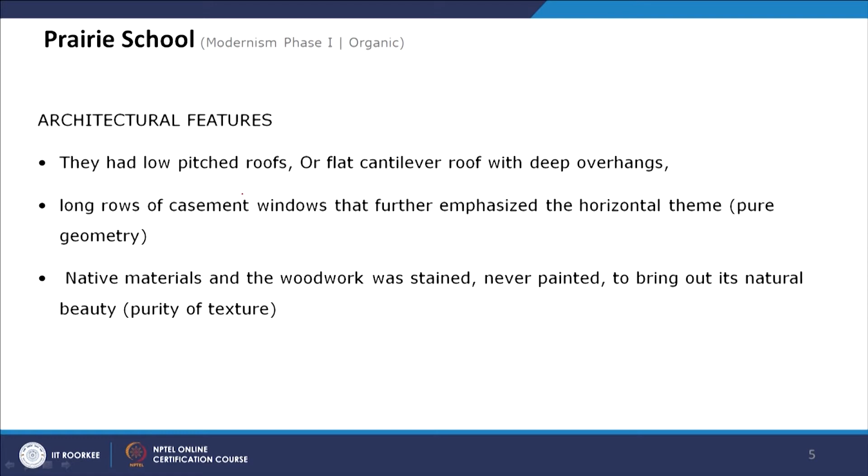So in Prairie, as we have already discussed earlier, it takes from the Prairie grassland, and then low pitch, flat cantilever, pure geometry, native material, pure texture are there. And we'll also see it's never painted, and the material's own texture and own color will be the final color and texture of the building. So that is also there in the Robie House and other buildings. And if it is plastered, it will be white plaster, and if it is concrete, the concrete's color will be there.

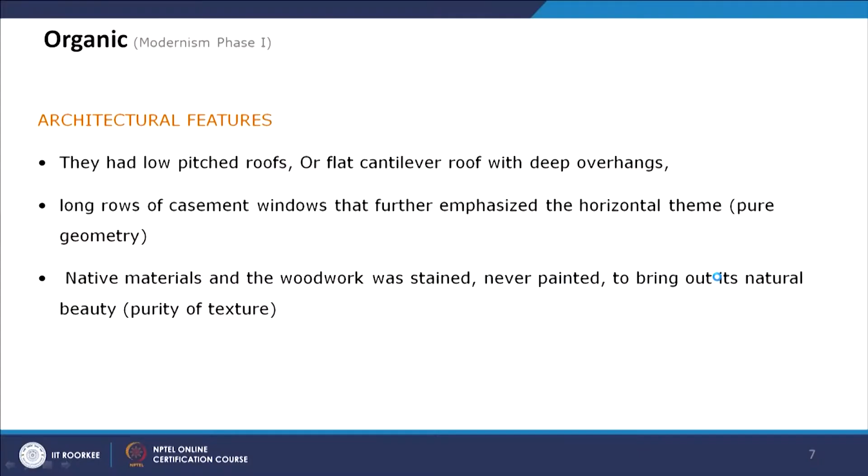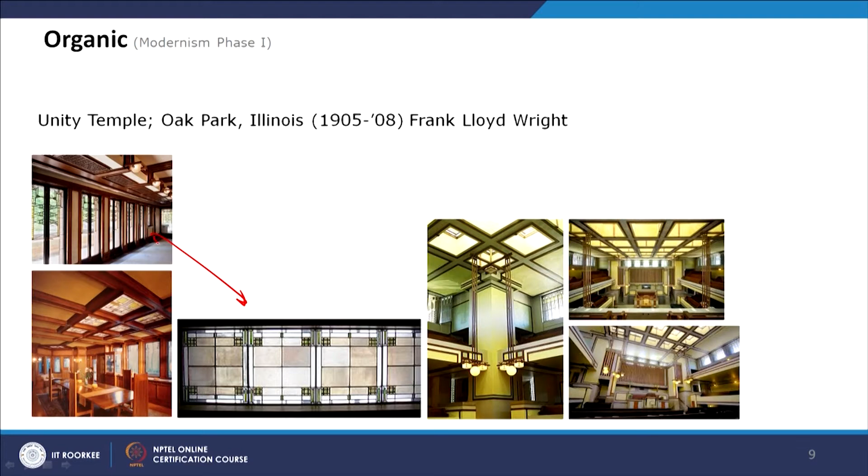So we have seen a few examples of Prairie architecture, and we started discussing the organic architecture style, and we discussed the visual similarity of the organic architecture style with the Prairie architecture style and Frank Lloyd Wright's painting. So you see the similarity in the interior design in Prairie and organic architecture style.

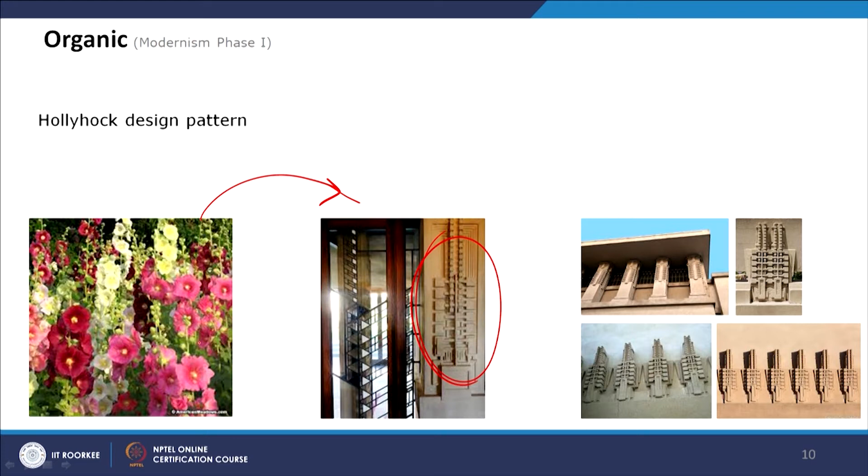And we have also discussed how a biomorphic pattern is an inspiration for making a geometric abstract design, which comes from the Prairie on the hollyhock flower, and that is how the organic architecture style imbibes nature and translates that into its design. So the same kind of flowers and floral patterns are there, but it's extremely geometric and modern in nature. And we have seen these biomorphic lines in the previous architecture style, which is Art Nouveau. So the whiplash pattern was there.

Now as we were discussing, from the more biomorphic style we are going towards abstract simplicity. The same inspiration of a floral pattern in Art Nouveau would have been done in a very fluid way, with biomorphic lines and no repetition, because in Art Nouveau, as we discussed, one pattern will be different from the others. We have seen that in Victor Horta's Hotel Tassel and Antonio Gaudi's work in Barcelona, Casa Mila, where all the lines are very fluid and no lines repeat. In Casa Mila's metal work, each and every balcony's metal work is different from the others.

But in the later styles like Art Deco and other architectural styles, we'll see repetition, so that it can be mass manufactured, and the motif can be generated in industry, and the same repetition can happen. So we see repetition, and we see more and more geometric pattern. So here we see total geometry, which represents nature, but in Art Nouveau we see a lot of curvilinear lines which represent nature.

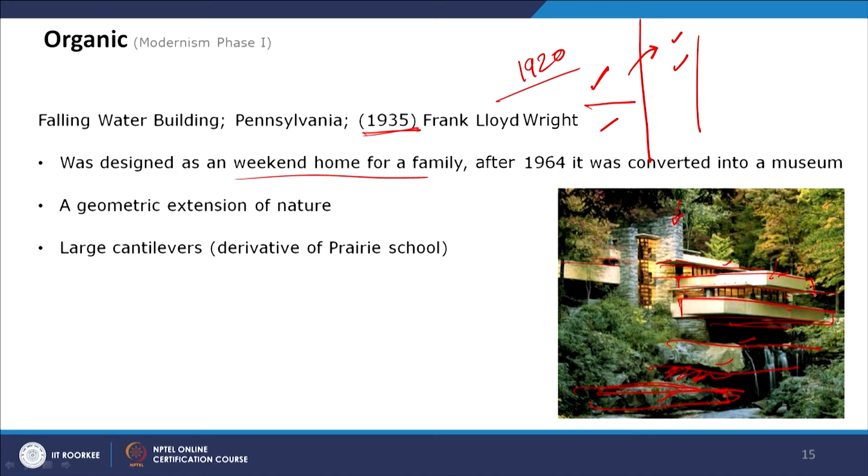He creates in the architecture a man-made element from nature. It's again a solid and then a void. Why is this a void? Because here is a series of windows, which is again an architectural style of Frank Lloyd Wright. We have seen the series of casement windows in Robie House, in the Oak Park building, and also in Unity Temple and the Hollyhock building. The series of windows gives a horizontal line, and here acts as a void. Because glass is a very fragile material and you can see through it, it acts as a void, then very solid, robust concrete, then again a void, and again concrete, stacked on top of each other, and the robustness diminishes.

So if you look at this, there is strong stone, a bigger volume, then a smaller one, and this becomes a more fragile and smaller volume, which is then repeated by this flat, very thin cantilever line. So gradually this diminishes from the bottom upwards.

And if you look at the texture, there is a texture break here, because this is a stone texture and this is white plaster, but here we see the stonework again. The stone masonry, which complements the color of this stone, is repeated as a robust vertical line, which again visually connects nature into the building. That is why this building is so important; it is a proper manifestation of pure artwork, blending nature into the building. And if you look, this building is situated on top of a cascade.

The water flows in the nature, and when the building is built, it's built on top of this cascade, but it does not hamper the flow of the water. The water flows within the building, and we'll see how the natural stone and water is also visible and amalgamated within the building's different rooms. So we'll see some other photographs of this building.

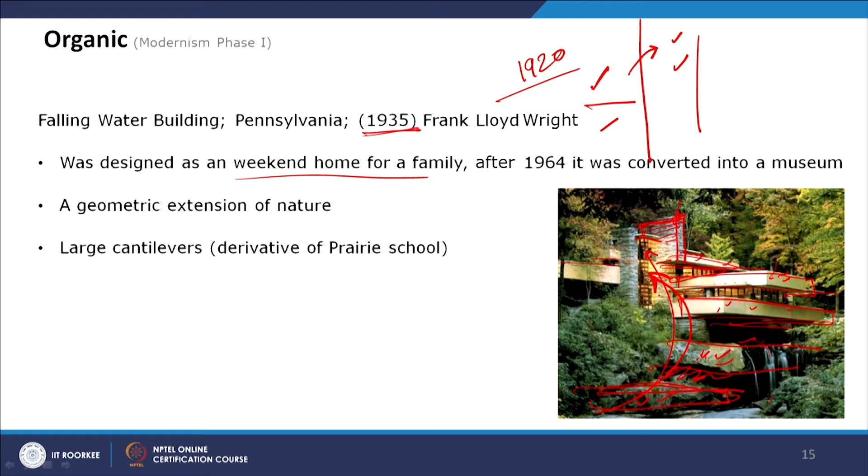it contextually responds with the nature, and nature does not create a pure geometry. But as the modernist movement talks about geometry and straight lines, this natural form, natural contour is divided into many different straight lines and many different cuboids, and arranging all these cuboids together gives the outline of the form. So this does not have a very solid and robust form from outside. This is broken from outside, and that responds to the curve of nature.

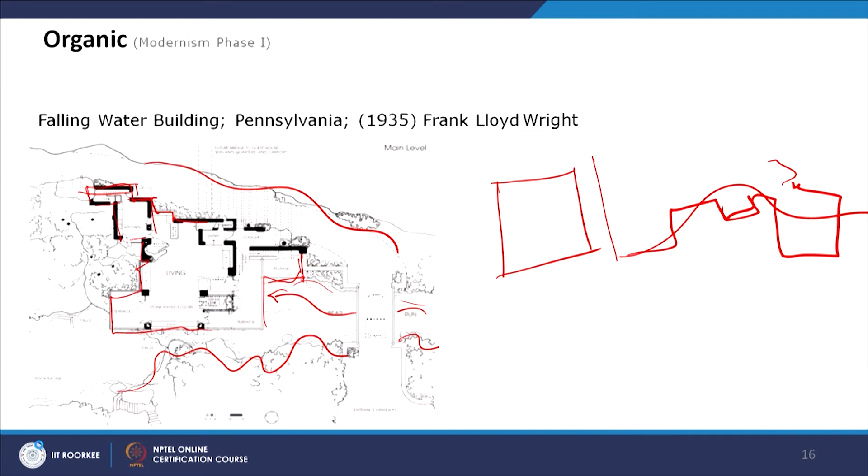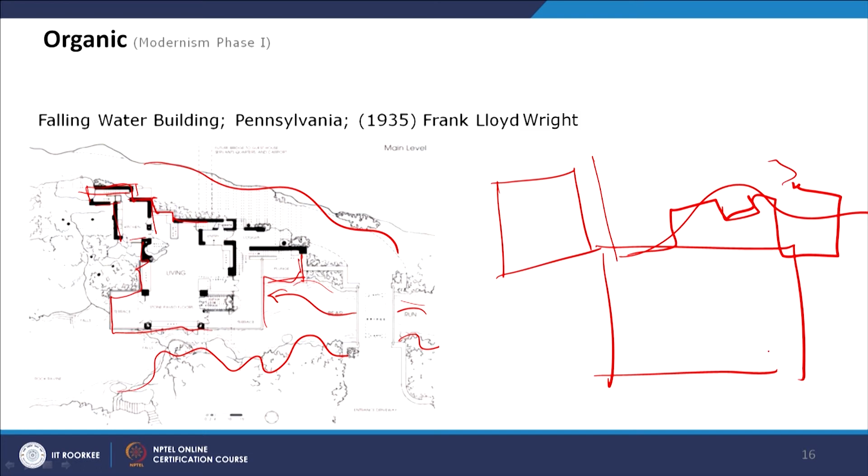And also you will see this stream is passing through this building, and if we look at the floor of this building, this also corresponds within the building as well. So if we look at the building inside, the building's floor has a natural stone. The flooring of the building is the stone which is available in the nature, and he did not polish the stone, and the undulations of the natural stones are also there inside the building.

And similar strong cantilever lines will be visible inside the building as well. So you see this solid and void which is replicated here, and the outside periphery of the building does not follow a particular line. So if you look at the structural member, which is the column inside this glass curtain wall, the glass windows, they don't match with each other, so that gives a more fluid form.

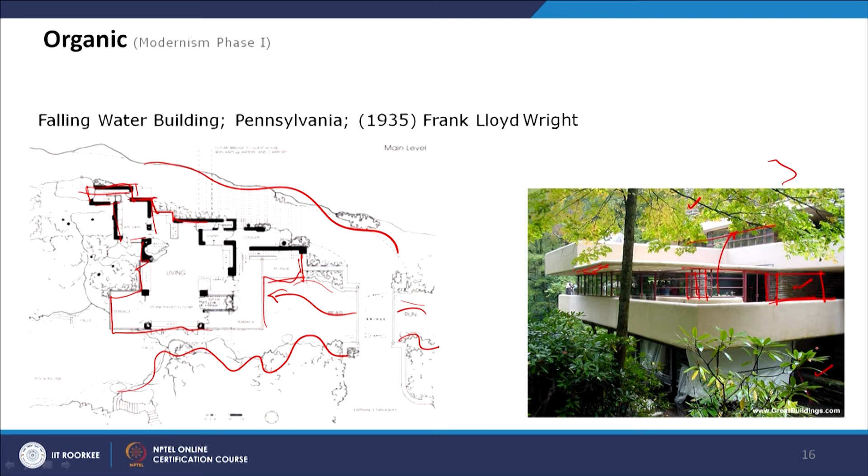And then if we look at this cantilever, it's a very thin cantilever which also has a similarity with the Prairie architectural style, and his style of long casement windows are also there. And in between you will see this kind of stone masonry work, which replicates the stone boulders on top of which the Fallingwater building is constructed. So that is followed within the building as well.

Now from each and every side there are small niches and small corners. You will see this kind of nature which blends within the building. So natural materials are also there in the built form, and corner elements of the windows are avoided, so that it gives a maximum view from the corner of the building, because this corner window gives a wider viewpoint.

Now there are other photographs you can search on the net where, within the building as well, natural stones are there inside the interior of the building near the fireplace. And the fireplace is what you see in the vertical element, which has a similar kind of stonework, the vertical element we were showing in the first photograph. This one comes from the fireplace.

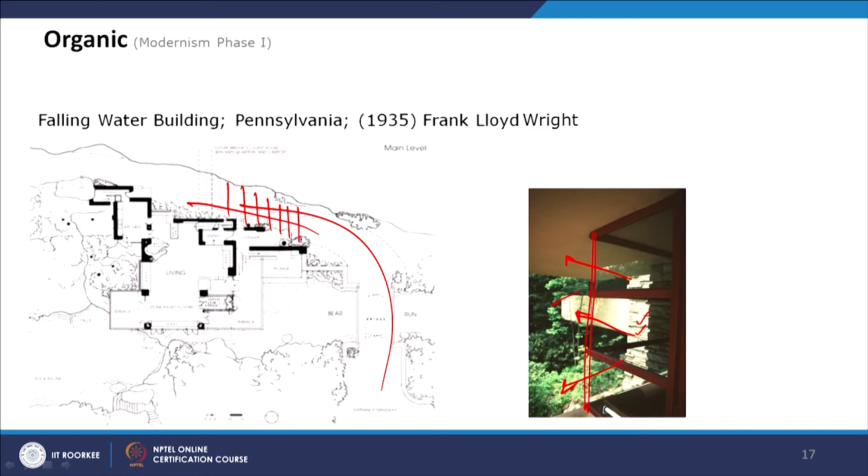Now if we look at some other works of Frank Lloyd Wright, which is not architecture, also in industrial design and in painting and window frame design, we see the similar kind of pattern in Frank Lloyd Wright's design.

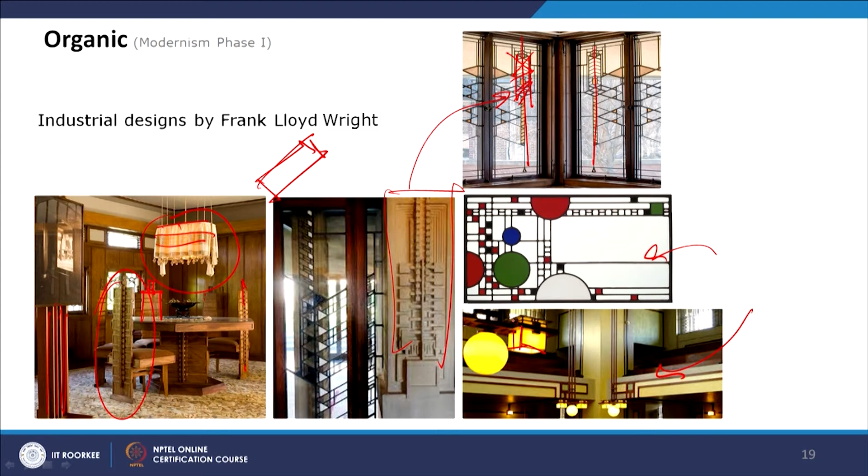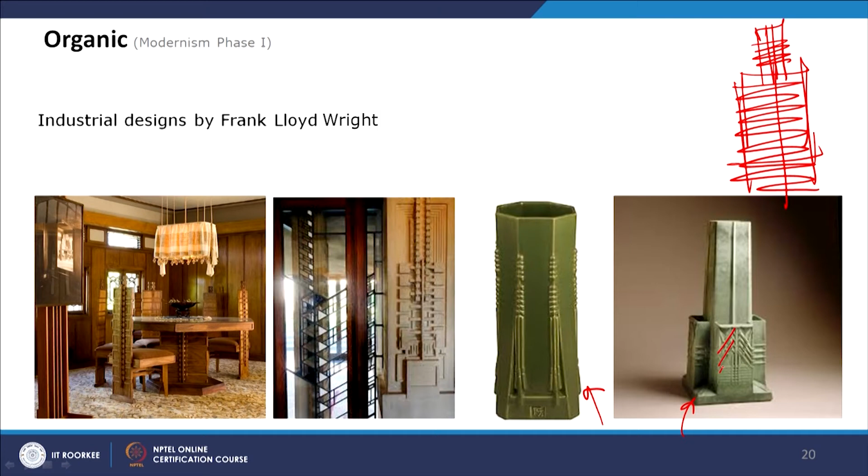Two of the vases are selected here for discussion, and if you look at the way he is decorating the vase, it is quite similar to the way he is decorating the window. So this kind of straight lines and triangles are also there in the decoration of the vase. And this is also a pattern evolved from the hollyhock flower, and the same kind of lines are used in this vase design.

There are many other furniture designs and interior designs, industrial designs by Frank Lloyd Wright. If you look through more examples, you will see similarity of his style. He also designed some murals, and also in the furniture, the woodworks and these straight lines which break and pass through each other, which is also there in different cases of furniture design in the interior. And also he designed some sculpture.

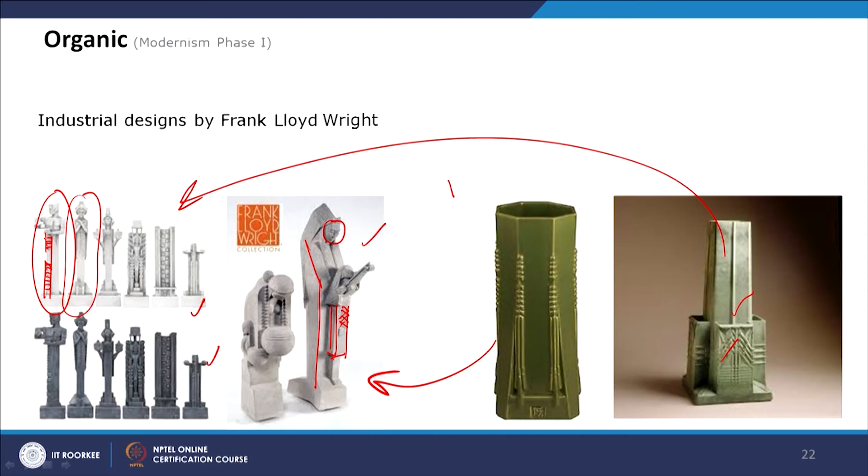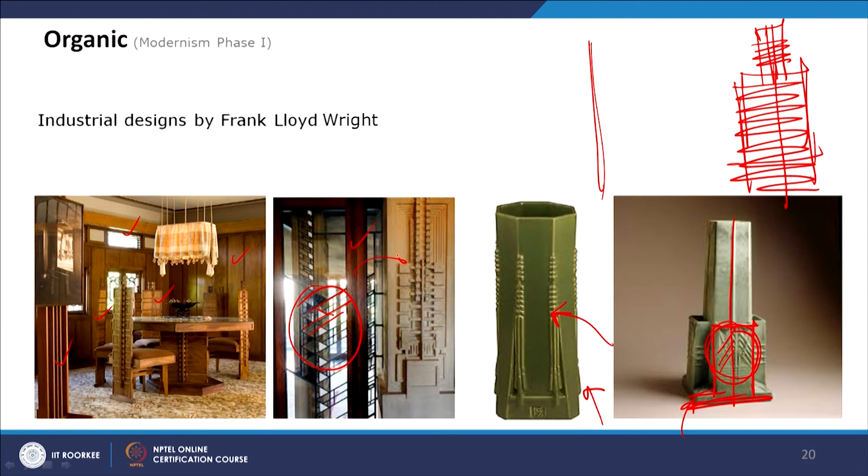If you look at the figures, these straight lines and series of lines which come from his painting, and even in Hollyhock house's interior, similar kind of line work is also there in each and every sculpture he has designed. And if you look, the ornamentation has these kind of beads and solid and void, which is there in his Hollyhock design and the other design patterns he has derived, and also there in the window design. You can see the similarity of this sculpture design.

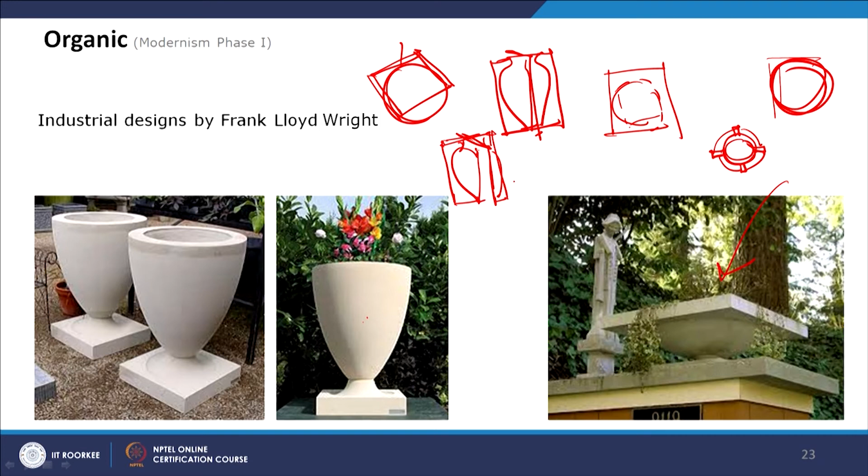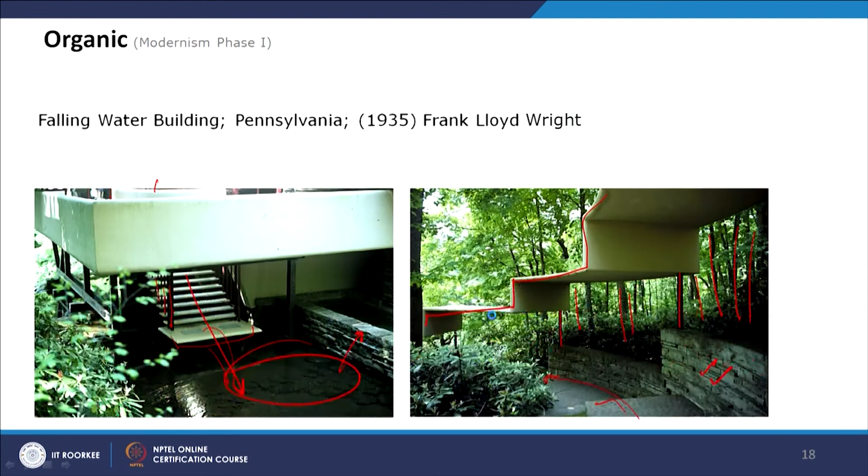So in the plan you will see this, but these four sections from four sides are coming out from the vase. So you see more examples of the design of vases and flower pots by F.L. Wright. You will see this mixing the geometry of circular and cuboid together, which you will see in the interior design like this, and especially in the Robie House design.

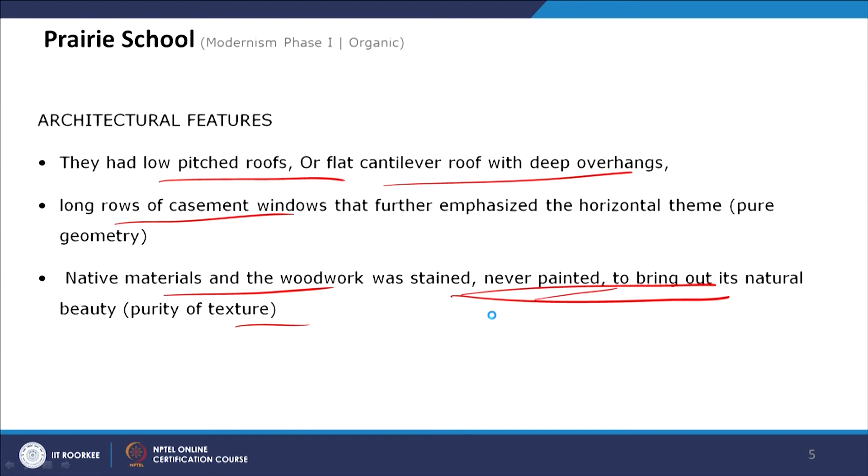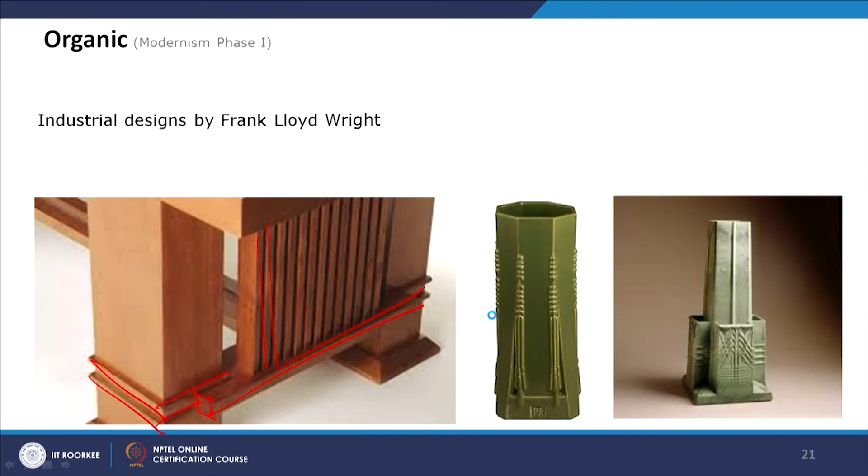Next we will start discussing the Art Deco style, which comes just after Prairie and organic movement. So Art Deco style, as we were talking about earlier, is highly ornamental, and it takes a lot of inspiration from Art Nouveau style, but again, the way we have seen in Prairie and organic architectural style, there is a geometric abstraction of natural form. For example, the way Frank Lloyd Wright was translating the hollyhock flower into pure geometry.

So that similar transformation is used in Art Deco, but it's again ornamental, and it's a reaction against the Bauhaus movement. Bauhaus talks about minimalism, and Bauhaus talks about functionality, and form will have a lesser priority than function. But Art Deco is talking about form, and aesthetics is very important there.